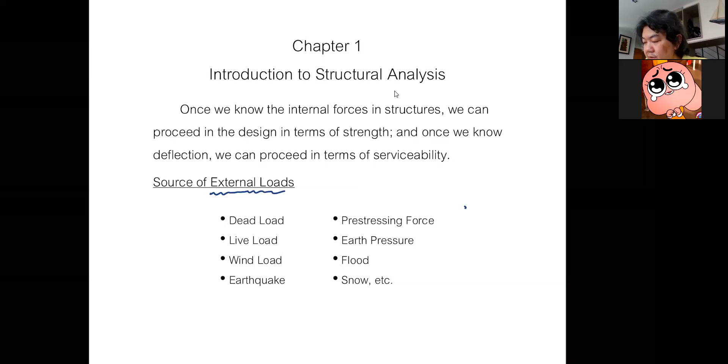Now, generally, the load that you see listed here, this is from the class note, the handout that I gave you. If you look at chapter 1, I begin the chapter by talking about the load. So, generally, this is the law.

So why do we have the law? You must be aware by now that in order to be an engineer, you need to have a license. This is a profession where a license is required, which means you are doing something that you have to be qualified for. Not everyone can become an engineer unless they are qualified. And the symbol of that qualification is your license. So when you have the license, you must be aware of the law as well, okay?

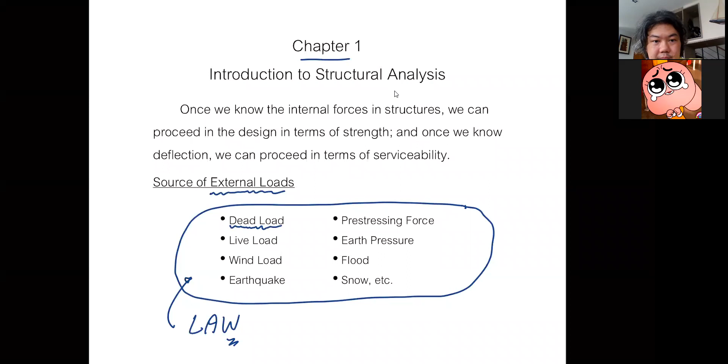So generally, when you want to build something, you want to build a structure, you need to know that there are laws telling you that your structure must be able to support the dead load. Do you know what dead load is? I don't know if I have the definition on the next page. I don't, so let's talk about that a little bit.

A dead load, by definition, is the load whose magnitude doesn't change against time. So you can say magnitude is constant. Can you give me an example of a load where its magnitude is rather constant?

Anyone? Self weight of material. Oh, that's good, it's self weight. So Nakarin, you're enjoying the class now, you participate. I hope the rest of you do the same thing. Yes, it's the weight of your structure, weight of your floor, the weight of your stuff that you use, furniture.

Furniture, right? Furniture is tricky because, let me continue to talk, there is furniture that hardly moves, right? And there's furniture that you can move around.

Because when we talk about the next type of load, the live load, what is different from dead load is that the magnitude of the live load changes all the time. Like us, for example. Now I am in the dining room. I can leave the dining room. And when I leave, the dining room has no load from me, right?

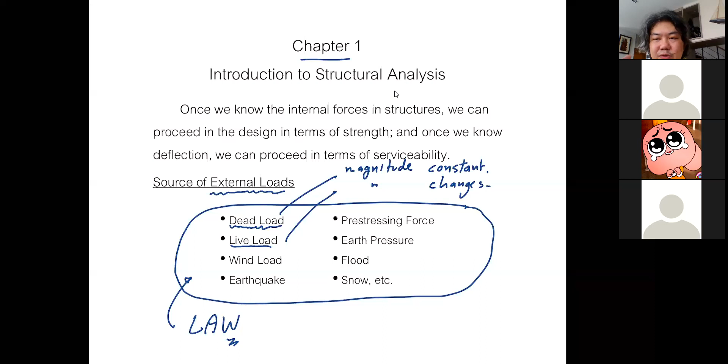But if you as an engineer are aware of the fact that the owner wants to store maybe rice, books, or some steel billet, it's going to be supremely heavy, so 400 would not be enough. You as an engineer must find out what is actually the load or the goods that they want to store in the warehouse and make the sound judgment of what live load you are going to use. The law says one thing, but you cannot always say, hey, I follow the law, I use 400, if the building falls down, it's not my fault. But it is your responsibility nonetheless.

Now, generally, these two loads, we can say it's a vertical load. This is vertical, or you can say it's caused by gravity. So some would say it's a gravity load.

Now there are some other loads where they don't come in the vertical direction, as we mentioned last time, so the wind load. The law would say if your building is tall beyond some certain level, you need to make sure that your building will be able to withstand the wind load. And the way you can calculate the wind load is pretty much based on many standards, which the law would refer to. So you need to be able to calculate the wind load acting on your structure based on the standard pertaining to the law.

Okay, an earthquake is the same. This is the horizontal load, abided by the law as well. So you as an engineer must figure this out.

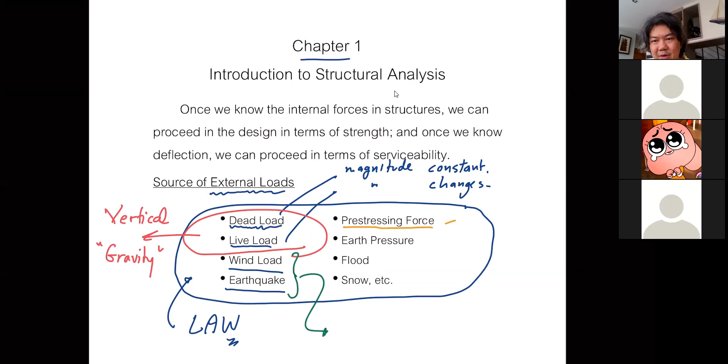And the earth pressure is another form of the horizontal load. Say horizontal here.

And in some other places, there will be some special load like flood or snow. You don't have it here. Snow load is gravity load. And many big buildings in the US collapse because of the snow load, because even though they designed the buildings for snow, when maybe the 100-year snow hit the town, the load would be by far worse than the engineer thought it would be. So it happened.

And somewhere you can have extra load where you have never heard before, like blast load. In some buildings, it will require you to design your building to withstand the blast from bombs. This is serious. And plane crash - have you heard of it? Tall buildings in the US are required to design to withstand the plane crash.

So if you can recall, this is a sad thing to say, but it's true. The World Trade Center building, WTC, that collapsed. When the plane flew into the buildings, those two towers, you see the buildings did not collapse because they were designed to withstand the plane crash, and so they did. But the main cause for the collapse was the fire.

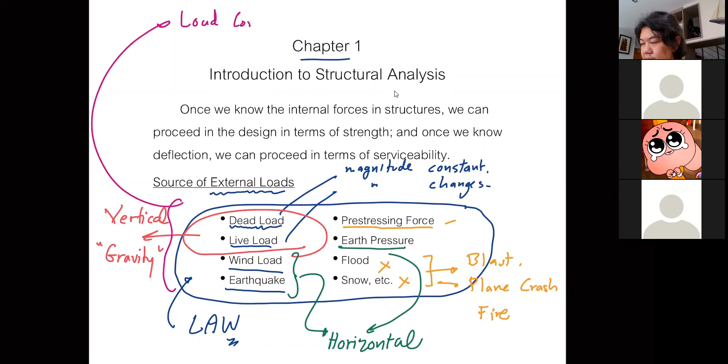In the real world, you would not say that the maximum dead load, maximum live load, maximum wind load, maximum snow load, and maximum earthquake load are all going to happen at the same time. That'd be crazy to think, hey, I'm in a building where the hurricane is coming and the earthquake is also coming at the same time, plus the building is filled with people, plus flood and snow.

So we cannot design the structure to withstand all kinds of loads coming together at once. It would be extremely expensive, and you'd end up with a structure so big that you cannot live in your building anymore. So we have to be sensible and think about what loads can realistically happen at the same time. That consideration is what we call the load combination.

Some codes will give you suggestions on load combinations, some will be pretty loose on it. So as an engineer, you need to study this thoroughly and understand what's going to happen. For example, the maximum dead load and live load can occur at the same time — that's the most basic combination you need to cover.

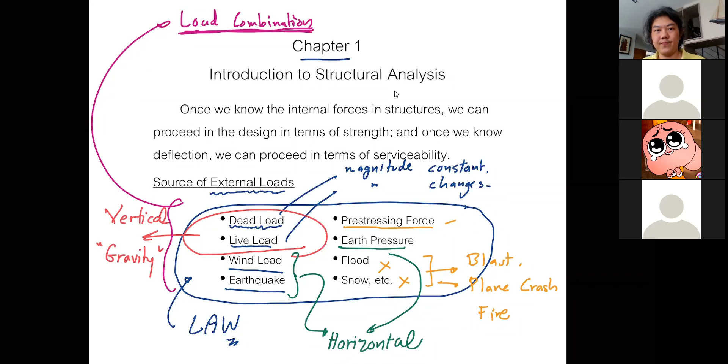Let me try to use something like this. So when you have the load, you put the load on the structure. So now your structure is carrying the load. Now what you need to do is to perform structure analysis.

You know, analysis is singular. If you have so many analyses, it becomes analyses — that's the plural form. You just change an I to an E and pronounce it analyses. That's the plural form, okay.

Once you perform the structure analysis or analyses, you will get the internal forces of your structure — internal forces, or stress or strain, and so on.

So now when you have the force, stress, and strain, this is when you compare it to the strength of material. If your material has a strength above the stress that occurs in the structure, it's going to survive. But if the stress exceeds the strength of your material, you're probably going to have a collapse on hand. That's why you study the strength of materials, to relate the stress caused by the external load to the strength of the material that you use.

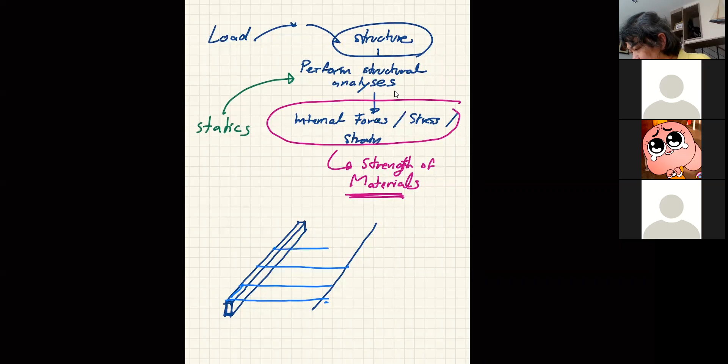So let's say if you have two beams, let me try using different colors to see if it helps. This is another beam, but I'm not going to draw it. If I put the floor on this, the floor will have pieces like that. So you see the floor itself is a simple beam — that means half the load will go onto the beam on the left, and half onto the right. Half of this piece will go to the left as well.

Okay, and then another half will go to the right. Half of this goes to the left, and so on. So that means this becomes the load that acts on the beam on the left.

Okay, say if I put the columns here underneath this beam. This beam would have the support, and it's a one span, so you can say that this is your simple beam.

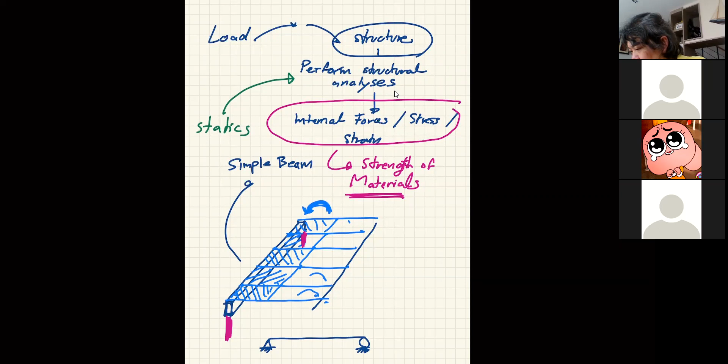And you already have the blue, pink columns as the support. So from this real picture, I can easily draw the free body diagram of this beam. It's going to look like this, right? And the load acting on this beam would be this blue floor.

Are you guys with me? Excuse me, it's an ant on my computer. It goes, it cannot withstand the wind load, you see.

So the pink one here, these columns will provide the support. I can paint this pink so that you know the columns are these two supports for the beam. And the blue one, this is the weight of the floor plus the beam self-weight.

Okay, so that's a simple structure with just two beams. But in the real world, I'm not going to have just this area for my building, right? So I could probably have more beams going on like this, and then I have more floor coming in. I put the floor on it again.

And that means now this beam would have to support the beam in the middle here, would have to support half the floor from the left and then half the floor from the right. So for the sake of clarity, let's give this beam a name B1, and this guy in the middle I'm going to call him B2. B2 would have to carry the floor twice larger than B1, because now B2 would have to carry the floor from this point on up to this point.

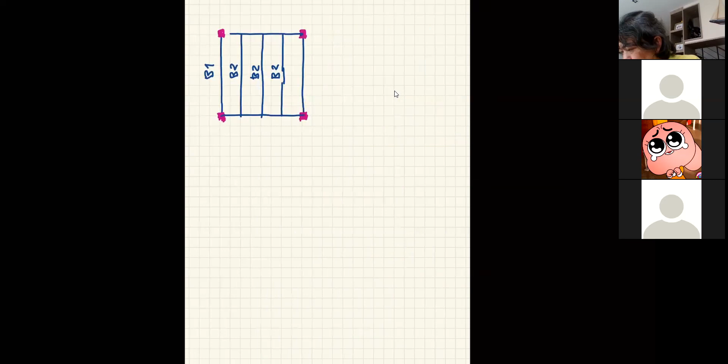So when you look at your floor plan, you will see this symbol, and you will realize that the floor is placed on B1 and B2s. Small pieces like this, a lot of them.

So the one piece of this blue floor, you can see it from this one. I don't know why I removed this. So let's one second. Okay, this one, so let me try to expand that a little bit. That's a piece of the blue one, you see?

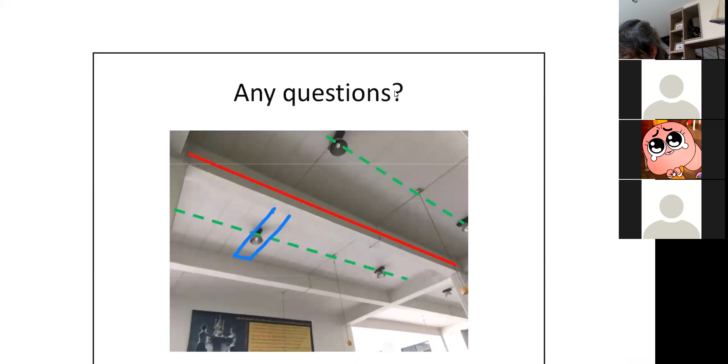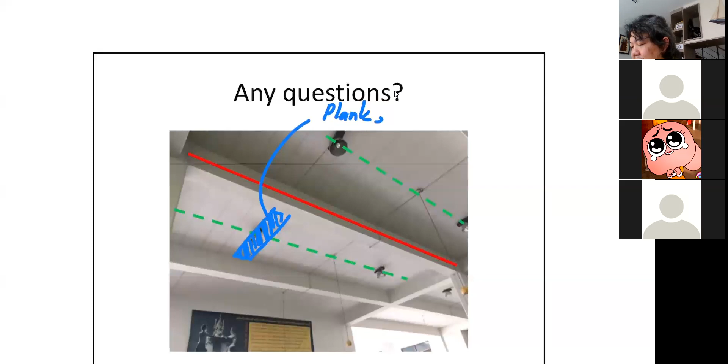They make it a small piece of the floor, and in Thailand we call this plank. A plank is the smallest one, or if it gets bigger, it's called the hollow core. Now these two are made of concrete. You can also have the one made of steel, that is called metal deck.

But again, you can see the direction that the floor is placed on the structure, and in this case we use this symbol. So this red beam will support half of this plank and then another half from this.

Just to make it better. Okay. And yeah, that's the direction of how we place the floor.

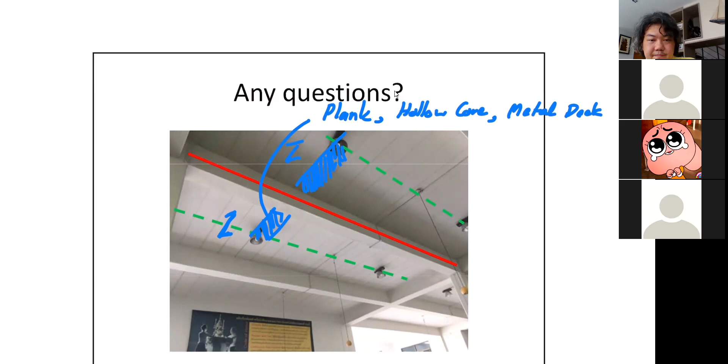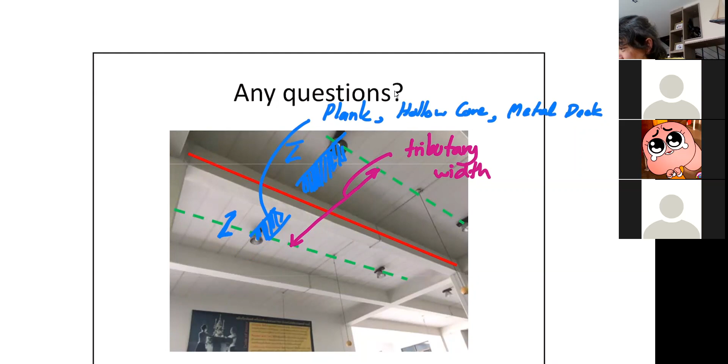So as I say, this is the tributary width that your beam must be responsible for. And if we come back to this one, yep, you guessed it, this is the tributary width, the same one shown in the picture.

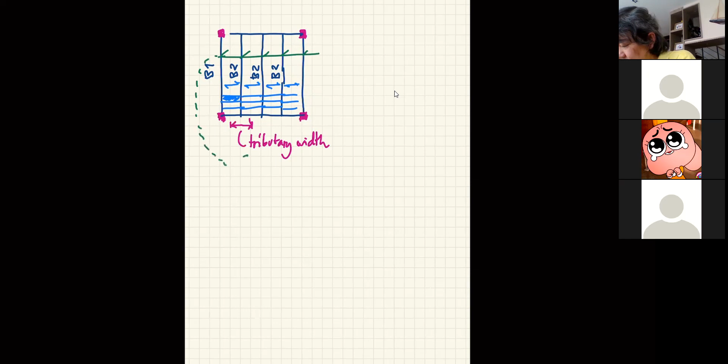Okay, and generally you would see that we call this beam, there's so many names for it. Let's move to the left because I want to use this space again. This is called the secondary beam. Some will say it's a filler beam, and some will say it's a joist.

In a system of Thai houses back in the day, a long time ago, where we used wood, we used this kind of system, but we don't call this a secondary beam. We call it 'tong'. Have you heard of that word? Tong, not trong. Tong. So it's a joist. Tong is a joist, and there are so many names for it.

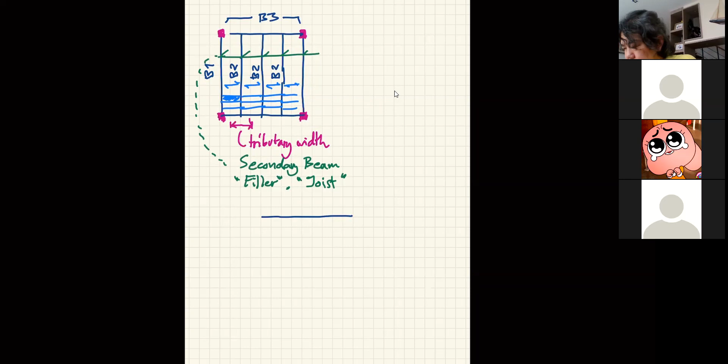But as you can see from this floor plan, the B2s need support. And in this case, we are going to provide the support for B2 by using this beam called B3. And if you look at B2 itself, it's pretty similar to B1, but it's going to carry more weight or more load from the floor.

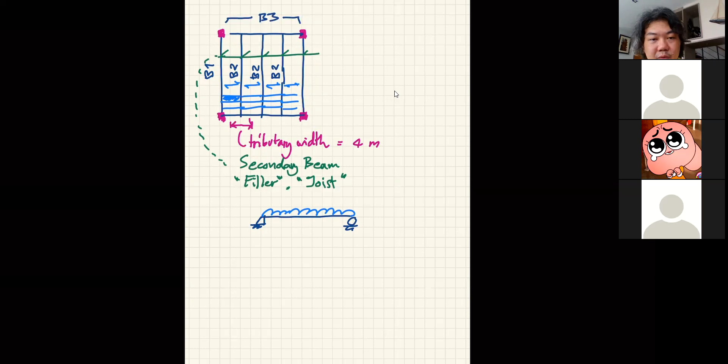Okay, let's say it would be nice to work with some numbers. I know you guys need numbers. So let's say our tributary width here is 4 meters. Please notice that the tributary width is always half the distance between each secondary beam. So if you place them equally, the tributary width is generally equal to the spacing of your secondary beam, right?

So let's say, I want to be more distinctive, let's use this one. Let's say the spacing here is 4 meters. Chances are the tributary width is going to be 4 meters as well, unless somebody's crazy and messing up the spacing, okay?

All right, so folks, this load is coming from the floor based on the tributary width of 4 meters, and then plus the self weight of the beam.

Right? Now let's come back and take a look at our B1 a little bit. To reduce our confusion, this is B2. Okay, and let's look at B1. This is one, it's a little bit low. But B1, you see now that we have the numbers.

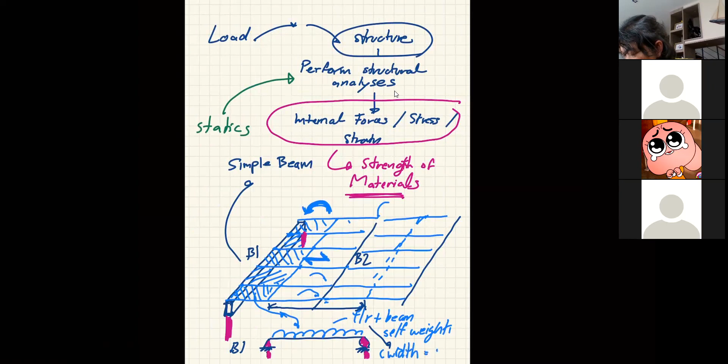The B1 is the floor, the tributary width of the floor of B1. I'm trying to use the same color, so it's going to be, it's fine. Floor width, because it's a beam on the edge, so the tributary width is 2 meters, correct? It is only responsible for half of the floor on the edge. Meanwhile, B2 will have to be responsible for 4 meters.

So now let's take a look at the beam number B3. When I draw B3, now B3 will be the one who has to support B2, correct?

So yes, that will be reactions from B2. These will be the reaction from B2. And what else are we missing? We are also missing the weight of the beam B3 itself. So that's a free body diagram of beam B3.

So up until now, is there any question? Hello? No, ka. No, ka.

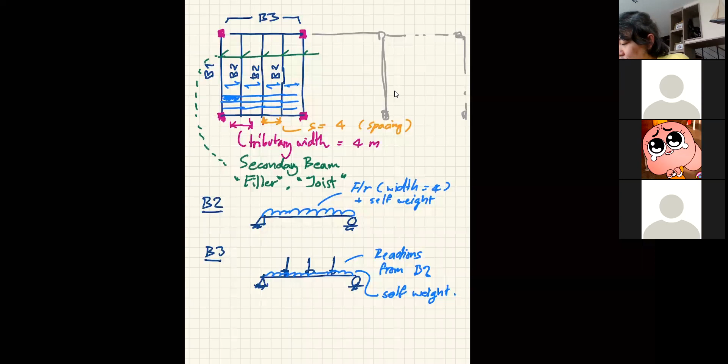Okay, generally it will go on and on and on. Oh no, it's not straight enough. Okay, and it can go on to the right like this, and it can go on down here as well.

So, generally when you look at B3 now, many times B3 is not going to be just one beam like this anymore. As you can see, you could probably have more than one B3, they go on and on and on like this.

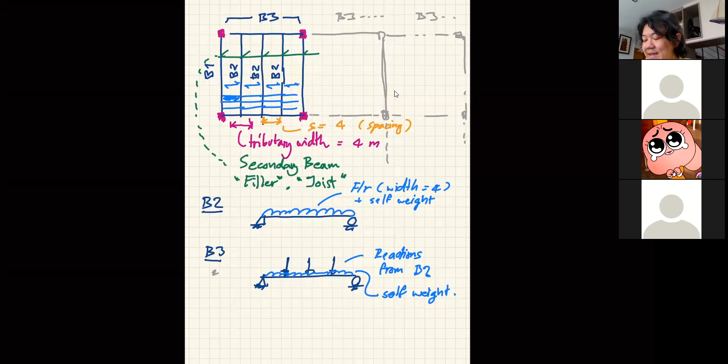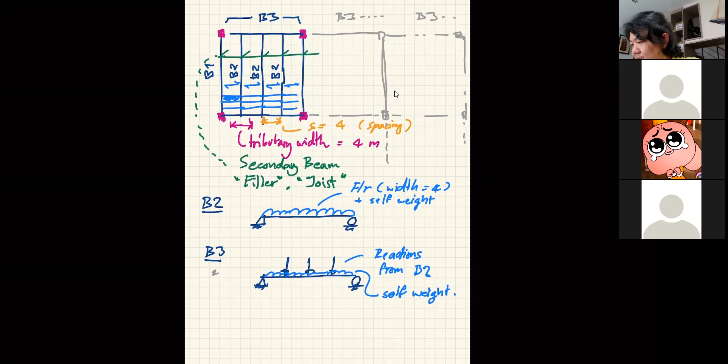So when that's the case, your structure becomes more complicated, because instead of having just one B3 now, you are going to have, let's use a new page. Okay, before that, you sort of have like one B3 like this.

In the real world, they don't just build a simple beam and put it together, because you're going to learn in the near future that a simple beam is not a very strong structure.

So when you begin to have more than one beam, that's 1B3. And then you have more. And then you have more. Let's say we stop at 3, okay?

Now you're going to face the structure where for the first time you have more reactions than you can solve. This is just the introduction, so don't get too downbeat about this. So you now have this reaction, this reaction, this reaction, this reaction, then that reaction. So how many reactions do we have here? I guess we can all count, right? Why am I asking? I'm just asking for your participation. So we have here 5 reactions.

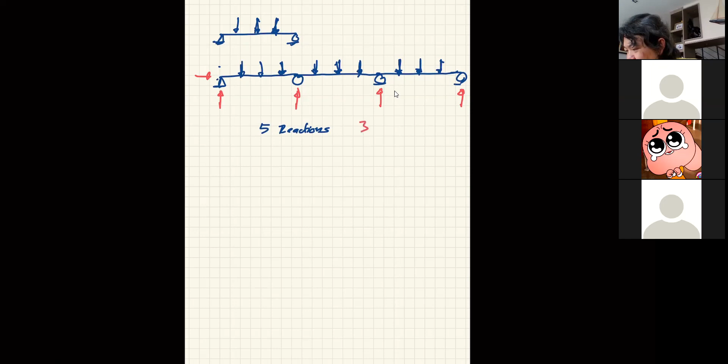Meaning we are now 2 short. We are now 2 equations short of what we need, right? Because in the typical case, when you have 5 unknowns, your reactions are the unknowns you need to solve. So when we have 5 reactions, I can easily call them unknowns. We have 5 unknowns, you can see. But we have only 3 equations. So we need two more equations so that we can solve 5 unknowns, correct?

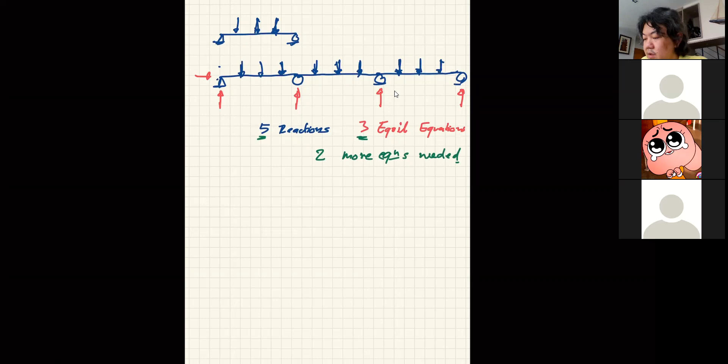It's that simple. So the difference between this... two more needed, 2 more equations needed. So when the number of unknowns is more than the number of equations, we call this situation indeterminate.

And to be absolutely correct on the name, it's officially called a statically indeterminate structure. Statically indeterminate structures. And because you need 2 more equations, these 2 represent the degree of redundancy. Being 2 equations short means the structure has 2 degrees of redundancy. You need to find 2 more equations equal to the degree of redundancy before you can solve this structure.

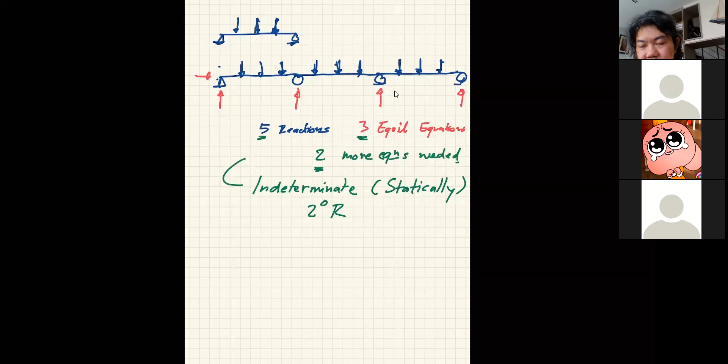So this is an example of how the structure can get complicated, so that you need more tricks in your sleeve to solve it, because sigma Fx, sigma Fy, and sigma moment will no longer be sufficient. In the beginning of the class we just showed you how load can be transferred onto your structure, and then you get into this kind of stuff where you need to analyze a more complicated structure with a new method.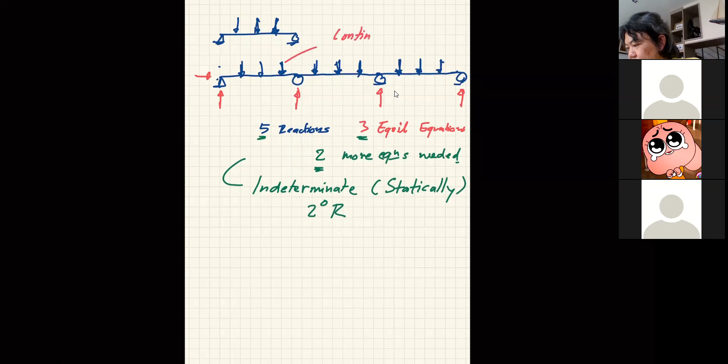Ladies and gentlemen, I can tell you right now that in the real world you can hardly find simple beams or cantilever beams. Most of the time you would face a structure like this, with more unknowns than you can solve for. We call this the indeterminate structure. I should also give you the name that this beam is a continuous beam, because it has more than one beam put together to create a continuous form, and you need to analyze them at the same time.

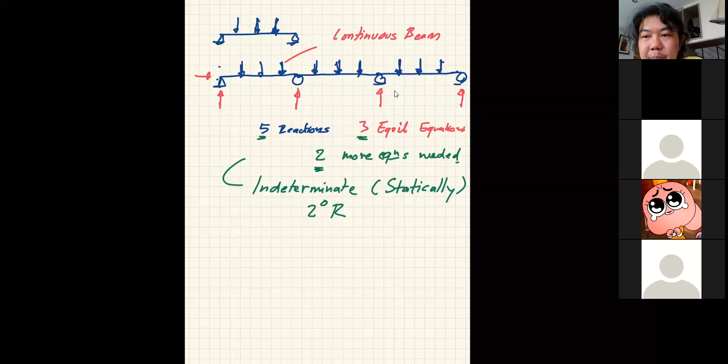Tributary winds, tributary winds... oh, tributary width! Yes. The trick of English is that you need to find the right place to stress. So, tributary - if you forget about the 'tri' and just stress the 'bu' part strongly: tributary width. The tributary width is the width that your beam must be responsible for in terms of carrying the floor or the load.

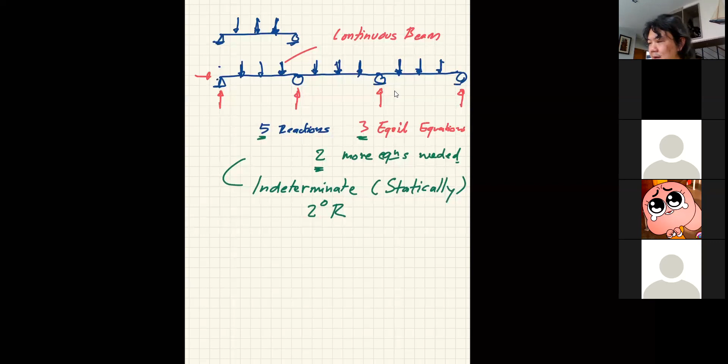Okay, so this red beam is carrying half the floor on the left side and half on the right. So the width of the half on the left and the width of the half on the right, when you combine them, becomes the tributary width. Actually it's this side and then that side - when you add them up, it becomes the whole width here. We call that tributary width.

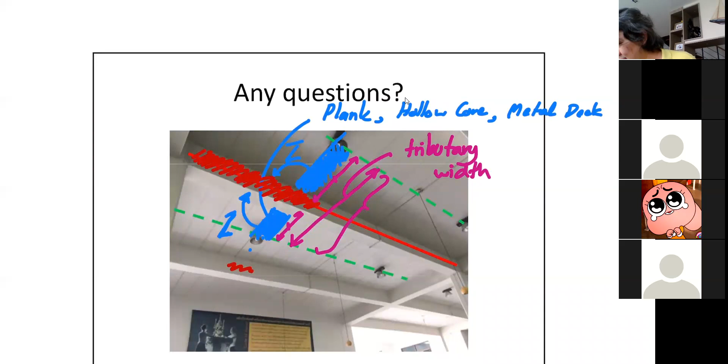So can we always consider the tributary width of the beam by the width of the slab? It's pretty tricky, and the word 'width' itself - right now if you talk about the width of the slab, I'm sorry if this confused you, but let me try to explain it. The slab itself comes in the shape like this. I'm trying to draw in the same direction - looks like a mess, let's try again. Okay, the slab comes in like this.

But it comes in many pieces, you know. So when we talk about the width of the slab, it's actually this width - the width of one piece of the slab. But the floor is formed by putting so many slabs together. So when we talk about the tributary width, it's actually half the length of the slab - it becomes the width of the floor that the beam has to support, not the width of this one piece as a slab. So when we talk about tributary width, it's actually this: half the length of the slab will become the width that the beam has to support, right?

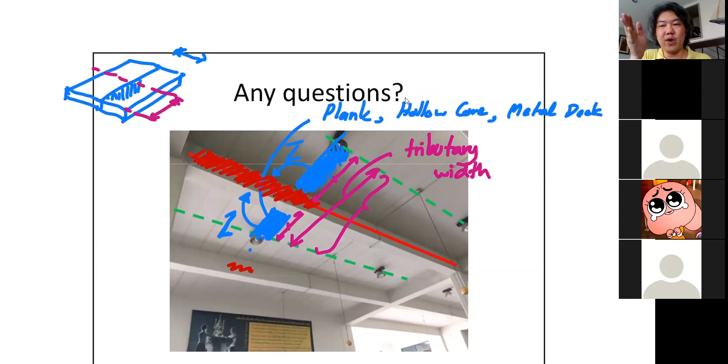Let me try to demonstrate something. Let's say, can you see this iPad? Too big, okay. If I support this iPad with my two hands like this, the weight on the left will go to this hand, and the weight of the other half will go to my right hand. But the width of the iPad is this, right? We don't talk about the width of the iPad itself, but the width that my hands need to carry - it becomes this width, or half the length of the iPad. So my right hand is supporting the half length of this iPad. And if I have another slab on this side, my right hand would need to carry another half of that. So half the length of this plus another half on the right becomes the tributary width that my right hand needs to support. Is that better?

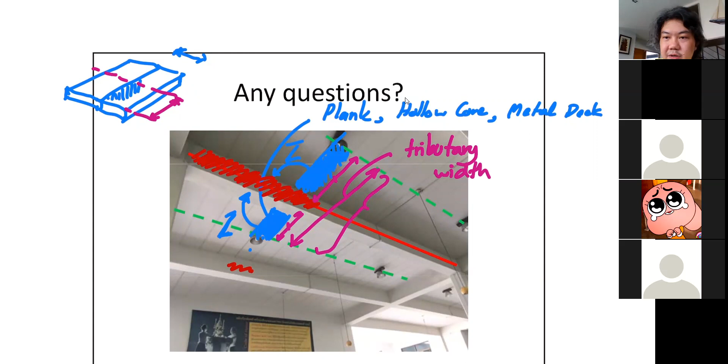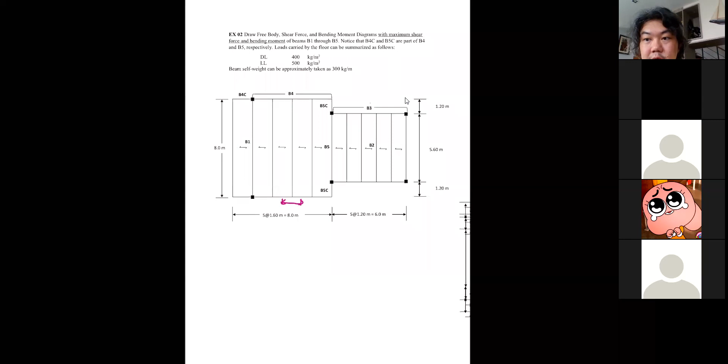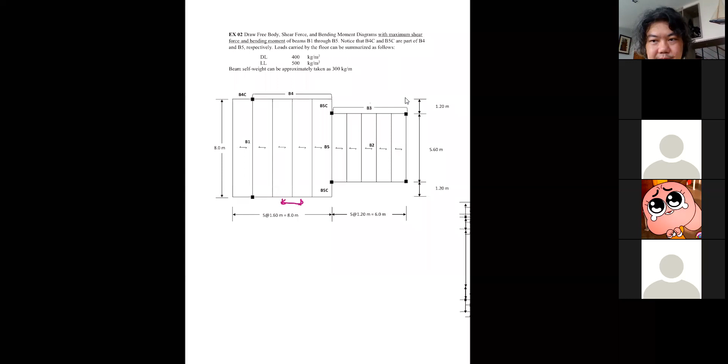It takes a little getting used to, I should say. The most common mistake students make is using the wrong tributary width because they got confused with the spacing. Generally when we talk about structures, when you look at the floor plan, they don't give you the tributary width, because that's how structural drawings are made - people need structural drawings for construction. So they don't create drawings for ease of calculation, they need them for the real purposes of construction. They tell you the spacing so people know how to put all the secondary beams in place. But you need to know that this spacing can be turned into the tributary width of the beam. Some students get a little confused and mess up the tributary width, and when you mess that up, you put the wrong load on the beam, and the rest of your work becomes garbage instantly. So does that help clear up the tributary width issue?